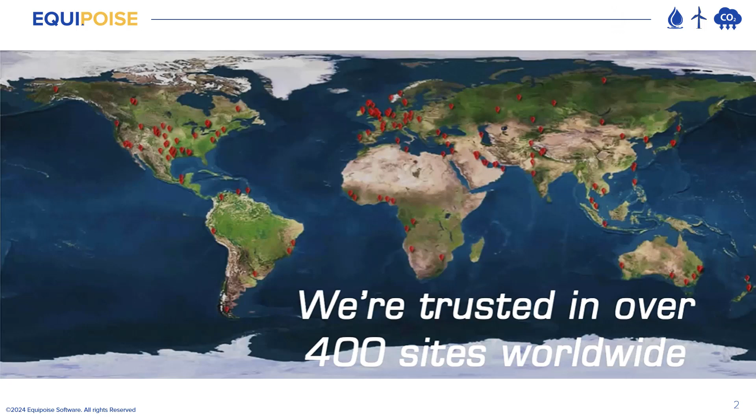In the pursuit of unravelling the mysteries hidden beneath the Earth's surface, accuracy is paramount. Every decision made in exploration and production, the sites for carbon capture and storage, and the placement of offshore wind turbines hinge on a clear understanding of the subsurface geology. I'd like to thank you for spending the next hour with us, where I'll discuss the importance of incorporating a new methodology to your geoscience workflows.

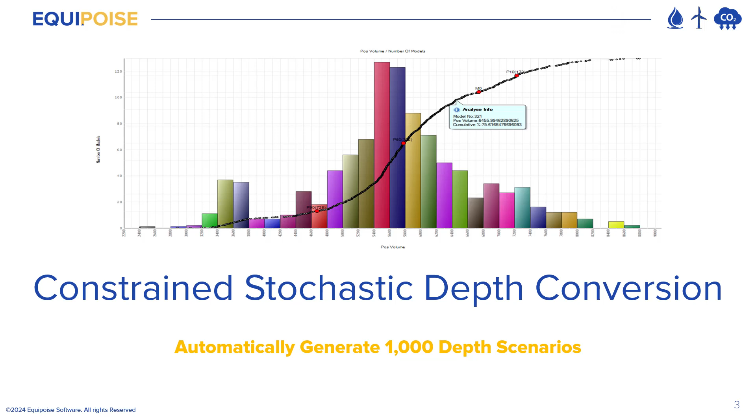Our cutting-edge toolset enables you to perform Constrained Stochastic Depth Conversion, which will revolutionise the way you approach subsurface analysis by enabling you to automatically generate 1,000 depth scenarios varied around your best technical case model. This methodology transcends traditional deterministic approaches by integrating geological knowledge and statistical analysis, whereby you control the range of variability per layer.

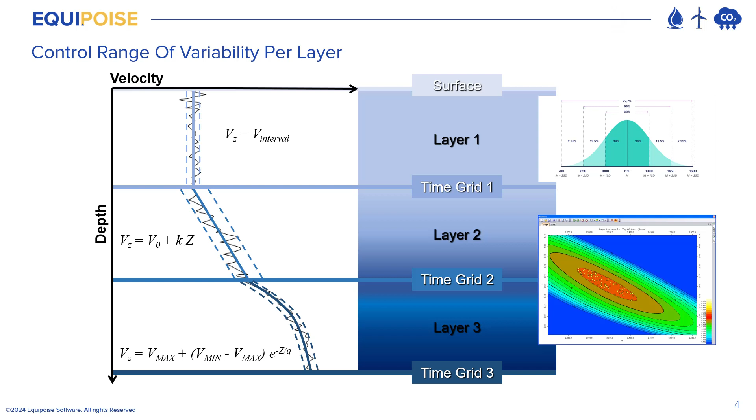Velit transforms uncertainty into opportunity, offering a nuanced perspective of the subsurface landscape. Whether it's optimizing well placement, delineating reservoir boundaries, assessing exploration prospects, or safely positioning geohazards, Velit empowers you to make informed decisions backed by robust geological intelligence.

By making a cost-effective investment, you can potentially save millions of dollars versus the cost of a misplaced well, and calculate a highly likely prediction of the gross rock volume of your reservoir. This workflow will thus determine the likely economics of your target prospects and ensure the safety of the teams working on the drilling rigs.

As I'm sure you're aware, modern-day pre-stack depth migration volumes, even with the latest full waveform inversion processing techniques, are created to optimize for the best seismic picture and are not optimized for true vertical depth. They also offer only a single model of the subsurface. The question I have to ask you is, can you afford to risk everything, including your reputation, on one model of the subsurface?

Velit easily enables you to de-risk your workflow by automatically creating 1,000 constrained models varied around your best technical case model, utilizing a scientifically robust methodology. This provides you with a statistically significant number of gross rock volumetric ranges and an understanding of where your PSDM, or best technical case model, is situated against your P10, P50 and P90 values.

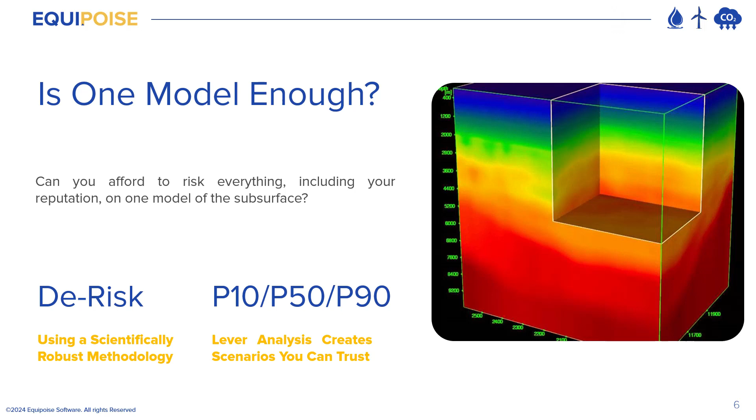You can also compute lever analysis to determine the geological layer most sensitive to the GRV calculations, allowing further constraint to your depth scenarios that you can trust. These models can also be summed together to give you a highly likely understanding of the structural closure of your reservoir. With Velit, you can now supercharge your subsurface decisions and be on target in depth with unparalleled clarity and confidence.

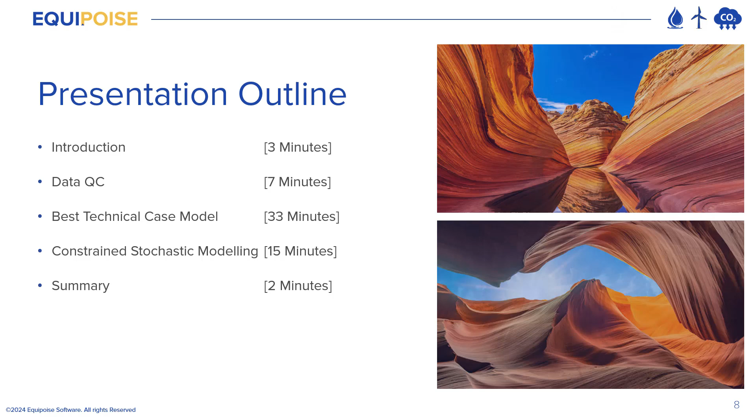After that brief introduction, the presentation outline is as follows. I'll spend a little bit of time discussing data QC, and then the importance of the best technical case model, before focusing the remainder of the presentation on constrained stochastic modelling. And without further ado, let's have a look at data QC. And as I'm sure you're aware, 80% of the project work is in the data preparation.

And here we are in Velit. Now, I've deliberately excluded the part of the presentation which surrounds the data loading. The main focus of this presentation is to discuss the highlights of the software, and while data loading is very important, I've decided to exclude it at this time.

Suffice to say that the key elements of data that Velit will bring in from Petrel are the time grids, the wells, the formation tops, and the seismic velocities. And we are going to construct a layer cake depth conversion model to describe the velocity changes of the layers accordingly.

Now, as part of the data QC, one of the key aspects is to have a look at the data that's come in. And one of the first things that we can do is have a look at the data in 3D. Now, this is to assess whether the auto pickers that are used in Petrel for interpretation have been used appropriately.

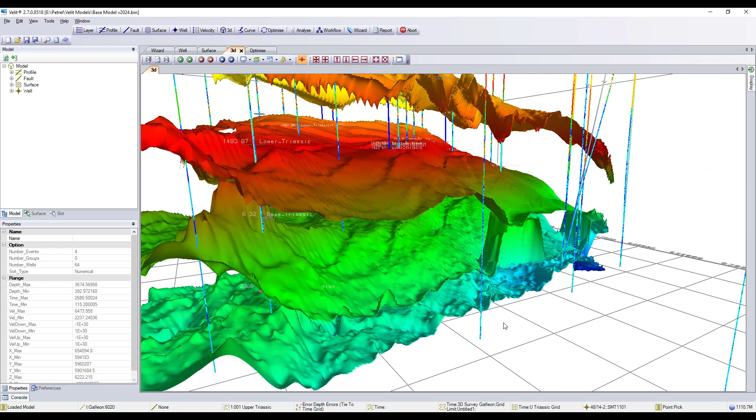And as you can see here, there's some picking issues where right at the end of a transect, if the picking was done in this direction, perhaps there's been an error introduced which is not geologic. In this scenario, what you would do is go back into Petrel, correct the error, and then reload the time grid and replace this third layer with the correctly picked grid.

It's important to note here that going through the data loader for this process would take about 30 seconds or so to complete this operation.

The next thing you might want to do is QC the wells. So in here we have the model tree, and we can select a number of different wells which we can work through and have a look to see if they are conditioned appropriately. Now this well has been divided into the 4 layers of the project, where the formation top, which you can see on the left hand side, meets the time grid on the right hand side.

One important aspect of using Velit, which goes back to the basics really, is that you really want your models to conform with the velocity changes that you see in your wells. Now this data set is a demo data set that's been supplied to us, and as a simple 4-layer model, it excludes some of the key changes in velocity which you'd want to capture in your models.

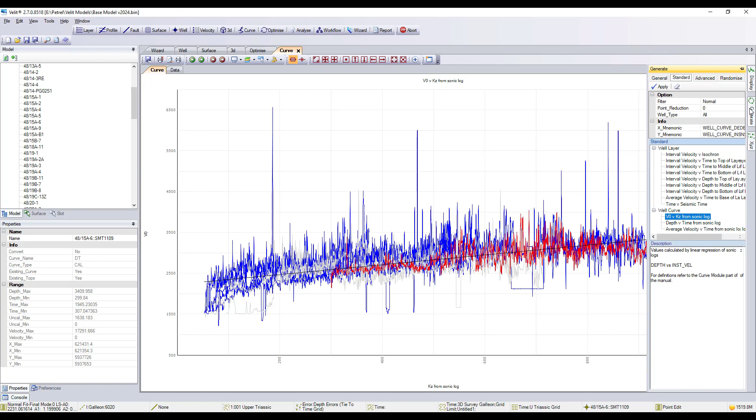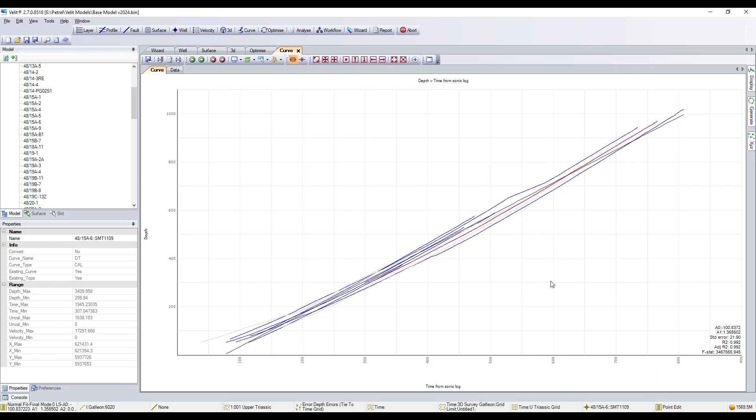Here you can also QC through the data in different domains. So here we can look at the logs in the depth versus time domain, for example, or you can have a look here in the average velocity versus the time from the sonic log. Again, where you might see a well operating in a strange position on these plots could help you identify some of the issues with the data and enable you to correct it.

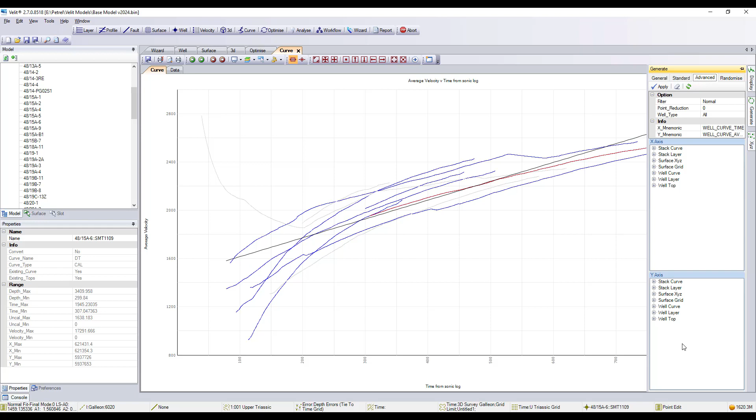When you're using Velit, you can use the Advanced tab here, and you can also cross-plot any x-axes versus any y-axes. And with all the data loaded, it means that all of the plots are available straight at the click of a few buttons for you to help you quickly work through and QC the data that you need to work on back in Petrel.

Performing the QC is quite iterative, but at a certain point you'll be happy with the way that the data is conditioned and you'll want to start building your best technical case model. The benefit of Velit here is that you can iteratively test many different functions per layer. So now I'll spend a bit of time going back into the software and having a look at all of the cool things that it can do.

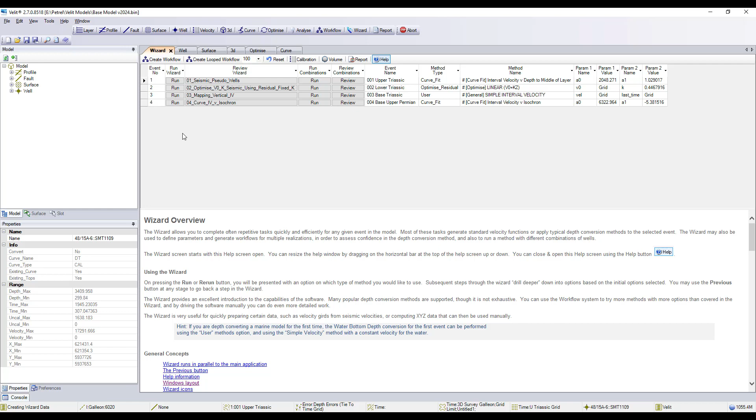Velit has been developed for over 20 years now, and we've more recently included the wizard, which provides you an easy-to-use interface for you to drive the software and perform the depth conversion functions per layer. Now, during this section, I'll start off fairly easy and work through some of the more complicated functions in turn.

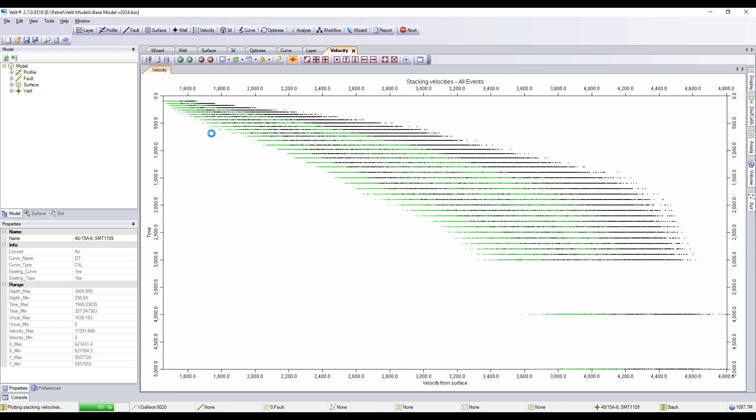If we start here with a simple graphing method, the software checks that the data is loaded okay, and what you have are a number of different graphing methods that are then explained in the section on the right-hand side. So providing you have an understanding of the language of geophysics, any selection that you make, you should be able to read the corresponding information to make an informed decision on your pick for that layer.

Now, Velit allows you to choose a number of different methods and to compare them such that you can iteratively find a best fit for the data that you have in your project. For this model, we'll just start off with looking at apparent interval velocity versus depth to middle of layer, and you've got the option to show the labels on the graph.

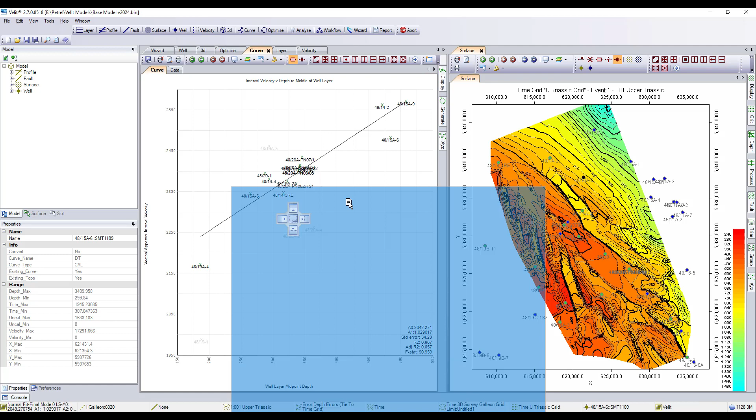Now, for this point, this video is obviously on one screen. If you're working in a two-screen environment, the software is designed so that you can dock the windows and stretch them over multiple displays so that you can have your analysis performed with more screen space. But on here, I'll just minimize these down just to get a bit of a better view for you.

Now, when you're looking at this, you're looking at the active well in the window here. So for example, you could open up the well tree, you could select a well, and you could see the well update here. You can see the black dot on the map update here. But when you're looking at the data in the curve display, you're going to be performing your analysis to understand the story that the data is trying to tell you.

Now here you can see some of these wells have been grayed out, and that's where I've turned them off using the point edit tool. You can also turn off data in the data tab using the tick boxes accordingly. When you select the data using the point pick, you can click on the data point and it will update the well and the black dot as the active well on the surface map and give you an understanding of where that is situated spatially and what is going on for the given layer. Now, the functions that we're looking at is just for layer 1 for this analysis.

Now here you can see that there is a replacement velocity that's been arbitrarily used for the well, and at this point, if you're under time pressure, you can just turn off this data point, perhaps if it's knocking off your overall regression parameter, which is shown on the graph here. If you include this data point, for example, you'll see that it makes quite a significant difference to the regression parameters. Now, in an ideal environment, you'd actually want to go back into Petrel and create a synthetic to surface to encompass this, and therefore remove this artificial value that's been created from this replacement velocity.

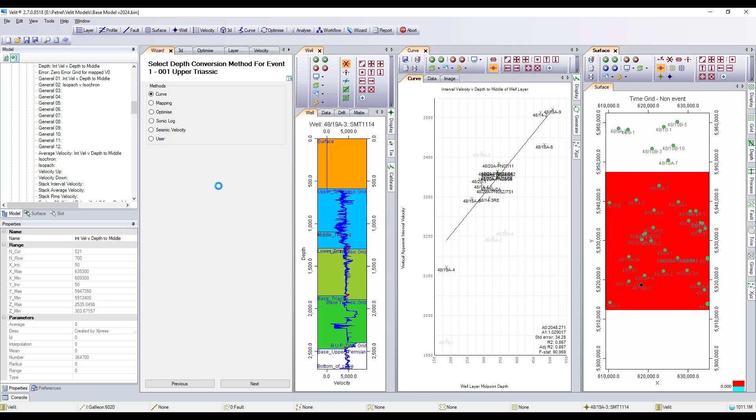Now, just to show you how quick it is to then compute another option, here you can select another function just by working through the relevant options in the wizard. We'll select isopach versus isochron. Again, there would be some time spent on the analysis that you would look at the data in, but assuming that everything is okay and the data is conditioned in good order, you can actually use the software very quickly just by working through the wizard, clicking next, and allowing it to do its job in doing the depth conversion using that function.

Now again, I will just click on next, ignoring error correction at this stage, and work through the wizard like so. So at this point, within about 30 seconds to a minute, you have your second function recorded, and in the relevant slot, the depth is then updated, and again, you can copy and paste into these slots. So you're then able to click on these values for the grid and for the discrepancy in the formation top, and with that compute things fairly quickly to get an understanding of how a best fit might be working.

Now, just between these two sets, you can see the values of the residuals are perhaps a bit higher, and therefore we'd be in a situation where the first option may be more appropriate to use than the second.

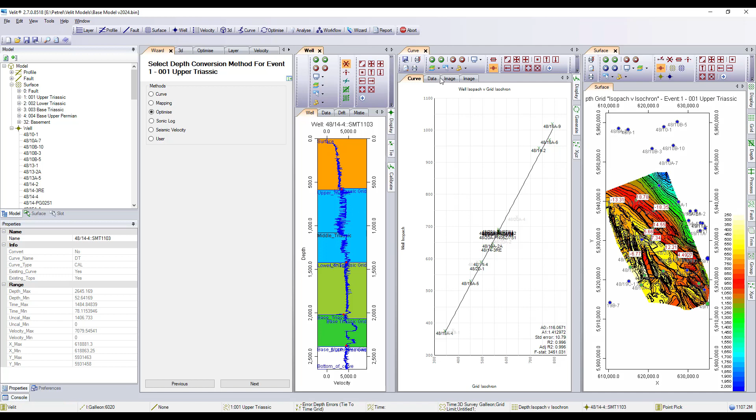Now, as I go through this presentation, we'll have a look at a couple of different options. But one of the key aspects of this in building the best technical case model is the use of our optimize module. Now, our optimize module was developed with Dr. Al-Chalabi, who wrote the book Principles of Seismic Velocities and Time to Depth Conversion, and it contains an algorithm that will obtain the optimum V0 and K value for a given layer that has an increasing velocity trend or decreasing velocity trend with depth. So, for example, if we're looking at a layer like this, this would be where the optimize would be useful to use.

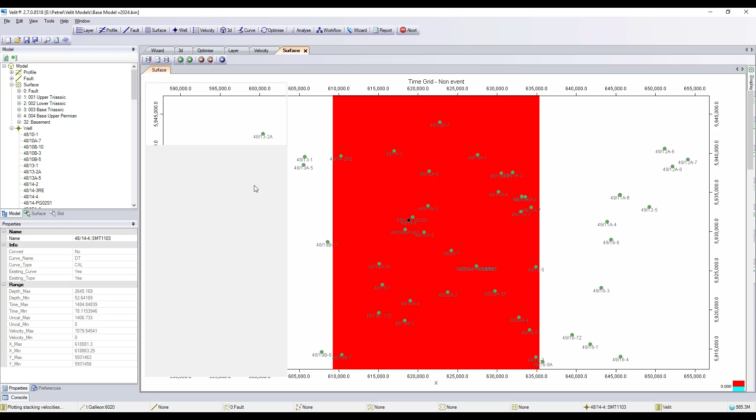Now, I'll just close these windows and run the optimize accordingly. So on here, what I'm going to do now, when the software is ready, is I'll just describe to you how the function can be worked to create a geological propagation of velocity per layer. Now, typically you'd work from the seismic datum, but there may be cases, if you're in deep water, for example, where you don't want the velocities to conform with the surface. You actually want them to conform with the seabed.

So Velit enables you to load that data and then select the seabed as the surface, and you would then assign the first layer to have the velocity of water contained within it. Alternatively, you've got the ability to encompass uplift and have the velocities again propagate in accordance with what they look like on the seismic. So if you see your seismic reflections being parallel to the surface or parallel to the base, you can set the P factor to be 0 or 1 respectively.

More often than not, you'll actually find that there's some level of decompaction, and that there is the percentage value here that you can adjust to encompass the velocities being propagated within the layer using that factor. In this project, I don't have deep water or any uplift, so I'm just going to work ahead using the seismic datum.

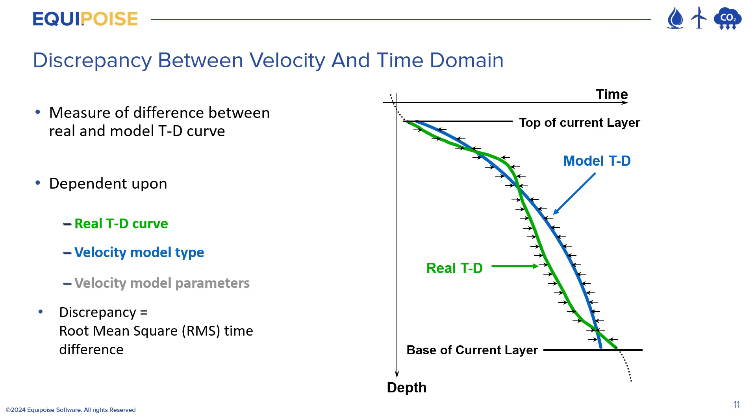To understand this discrepancy, at each sample down the data, we can calculate the root mean square time difference to get an overall understanding of just how good a fit our model is.

One of the key teachings in Dr. Al-Chalabi's book highlights that the minimum discrepancy does not imply minimum depth error. If we look at these two models on these graphs, the first on the left-hand side shows the actual data in green, with the model time depth curve being very closely aligned to it, as the model is force-fitted to the data.

Hence there being a non-zero depth error. On the right-hand side, you can see that the vertical apparent interval velocity has been computed such that there is a zero depth error at the well location. What you'll note is that as the model moves away from the well, you're then not predicting velocities very accurately at all.

Hence you have a poor velocity model. Velit is quite special, therefore, in this case, that it enables you to compute velocity models for a given layer in the time depth domain. And the algorithm used does this force-fitting process such that you can have a very robust velocity model even from one well.

The benefit of using this technique is that the velocity model is independent of the seismic interpretation. It can estimate a reasonably good result even from only one well. It honours the well velocity data as much as possible. The residual depth errors offer the opportunity to evaluate the difference between the model and reality, and the depth error can be corrected later in different ways.

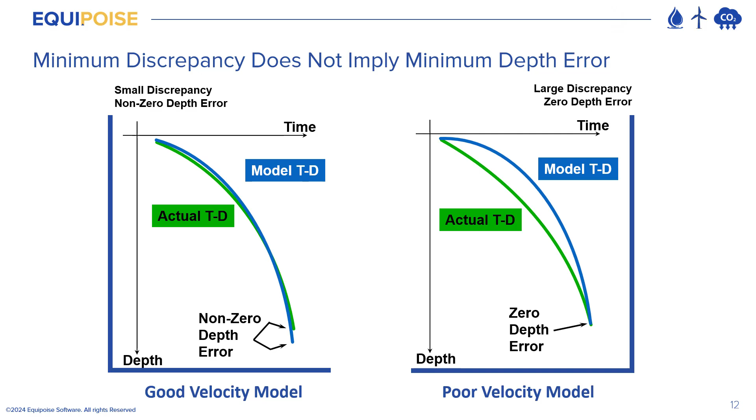Now that you've got both of these graphs in your mind, I'll go back to the software. The fit to well curves method relates to the graph on the left-hand side, where we're going to use the algorithm to force the model to bend to the data in the time domain. The second option, to minimize the residual tie with the well formation tops, is the graph on the right-hand side. But this is only really useful if you have a high density of well data.

In looking at the software, what we can see is that before the optimize is run, the algorithm has determined all of the possible V0K pairs for a given well and determined the best V0K pairing for that well, as represented by this dot.

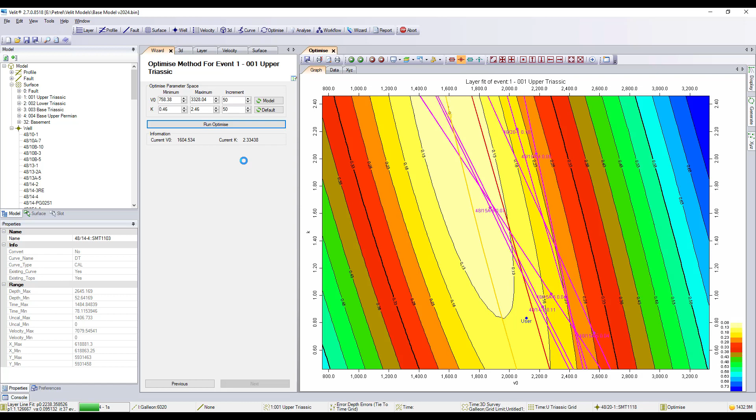Now, all of these are then computed in turn, and when we run the optimize, which just takes a few seconds to run, these values are then contained within this solution trough, where the best fit for all of the wells is determined by this value here. So the K is determined, as is the V0. And this would be the value used to compute the velocity field per layer.

In moving through to the next screen, we also have the option within Optimize to fix K and contour V0. This could be especially useful if you have a facies change across your survey area.

So for example, if we compute this option, we'll see the values of V0 at each of the well locations in turn. Now you can see in this data set, even from the range of data, that there isn't a facies change here. We're not seeing a strong change in velocities. These are all representing fairly soft rocks. If we were going to carbonates, etc., these might be toward, say, 5,000 meters per second. And this application of this process would then balance out that variation.

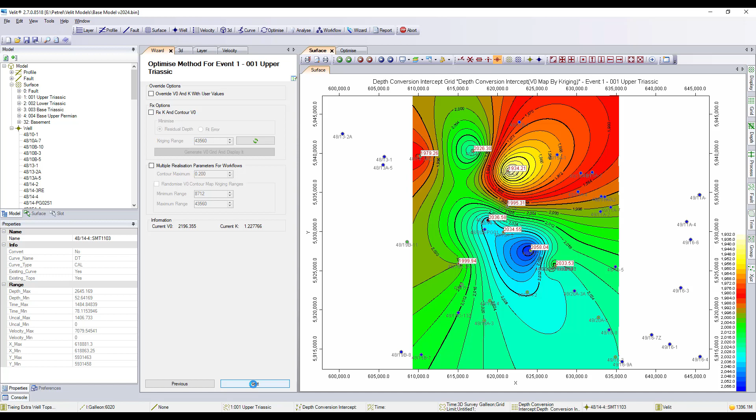So you can have both a vertical velocity gradient and a lateral gradient encompassed using this technique. Now, as we don't have this option available in this data set, it's not applicable. I'm going to press next and work through to compute the final depth map.

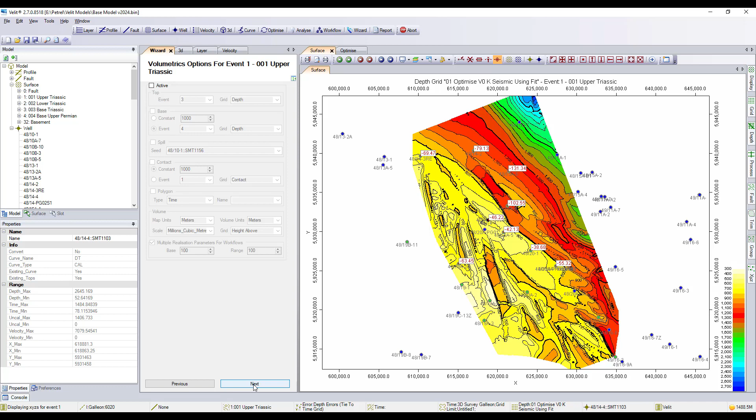Now on here, you'll notice almost immediately that the values at the well locations of the residuals are reasonably high. And if you imagine your discrepancy as a percentage of depth, you might be able to understand that there's an issue here, that we go from depths of around 500 meters down to about 1,200 meters.

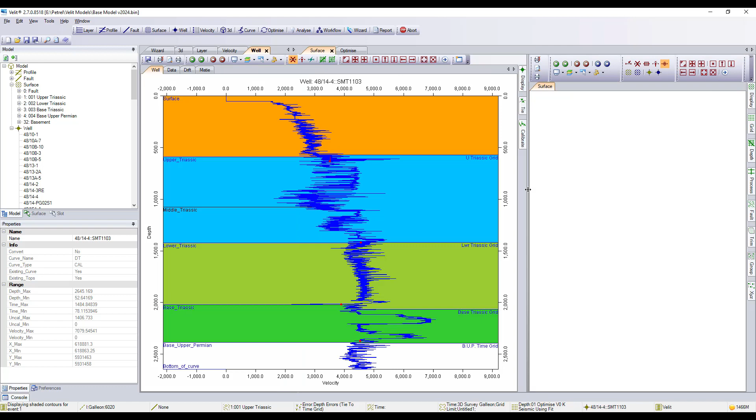So these are too big. If we have a look at this against the well for this project, what we can see if we expand the well display is that at this point here, the velocity model really should be broken up into a separate layer. And what Optimize is doing is trying to fit a regression through this data and therefore computing an answer which is too fast, as this layer has not been broken out.

So this is really just been used to highlight the importance of getting your layering right, as the Optimize will do the best job it can with the data it's being given. But you will see here that trying to average too much will not give you the accuracy that you are perhaps looking for.

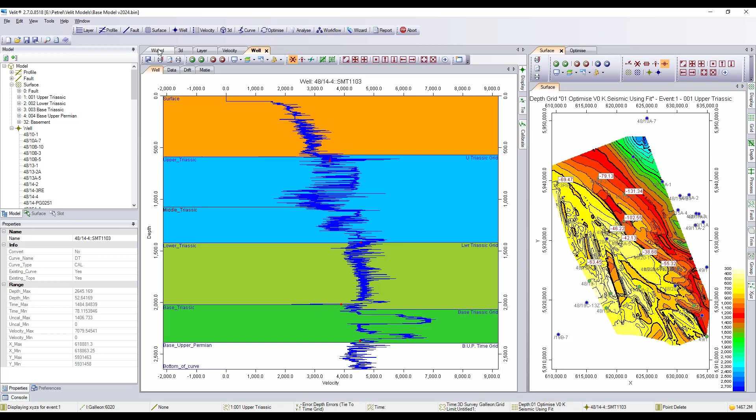The next thing I'd like to discuss with you is the use of seismic velocities with your project. And in here, we have this seismic velocity calibration wizard that we can use to calibrate the seismic velocities on a per layer basis.

Now I'll just run this calibration on the first layer for you to get an understanding of what it does. The software permits you to use a single value to compute a scaling factor, which would compute the Dix scaling and adjust all of the velocities by that single value that you would choose based on your analysis between the wells. You can also compute a single constant from a graph through a regression through the data points.

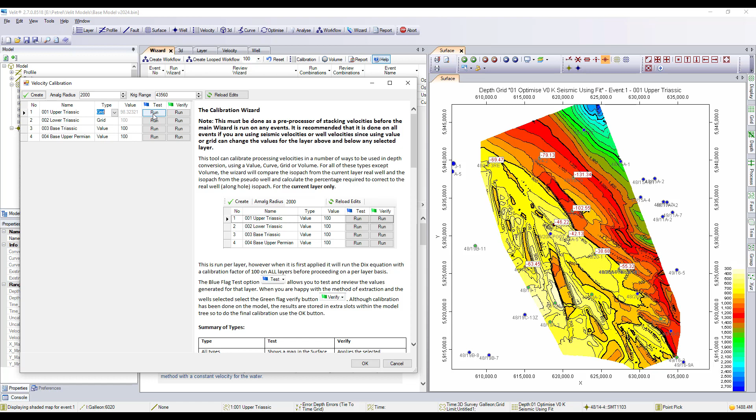But the most useful option is our grid method. Here what you're able to do is have the software determine the scaling factor that would be appropriate to tie the well velocities to the seismic velocities at each location.

As this grid has been generated, you can see in this data set there are some issues in some of these wells, some bullseyes that stand out. If you were to QC these, you'll see that there's a discrepancy in the data, and this is again something that you would want to fix and have the data conditioned appropriately.

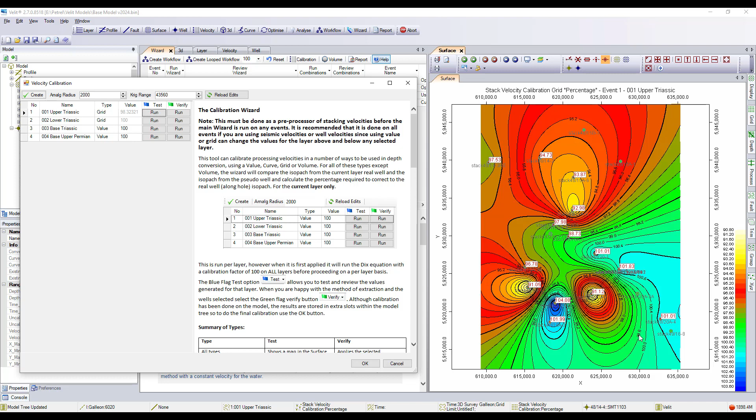Once you have this grid computed, you can then run the correction of the velocities for that layer. So at this point, we can click on Run, and these are then the values after the calibration has been performed.

So here at this point, you can see that the velocities are 100.32%. And what this relates to is that there is a slight rounding issue. So you can see that maybe the perfect match was 99.5, for example. And most of these values have got to almost 100% through this calibration.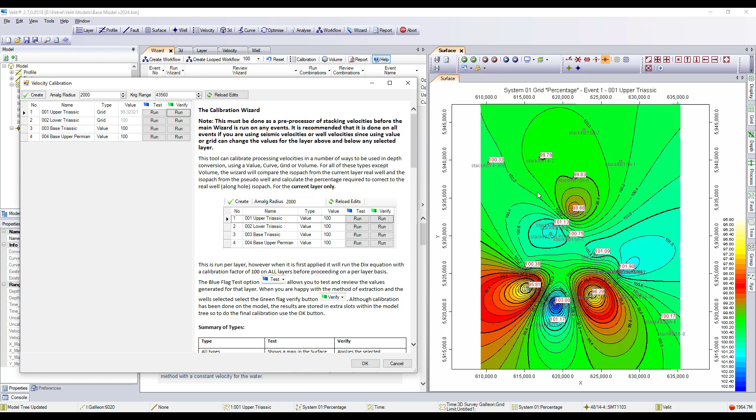Now this is very important because this lateral scaling factor that you have can then give you a strong confidence in the move or the shift from the processing velocities, which we know aren't optimized for true vertical depth, and in calibrating them to the wells in this grid format, then you will have the ability to leverage them for your work going forward. So you would perform the calibration per layer, running it through each time.

Once you've done that, you can then use the seismic velocities in the software for a number of different options. Within here, you could just use the velocities from your volume uncalibrated. You could do a direct depth conversion of those velocities, as you can see here. But typically, as you might be aware, this isn't going to give you the accuracy that calibrating the volume will give you. Now, there are a couple of techniques that we can discuss.

The first is if you have fairly flat geology. So here you can generate an interval velocity grid with no depth conversion. And in this process, you've got the ability to then smooth the velocity data that you have within the model. As you can see here, the velocities are contained within the project, decimated and illustrated by these pink dots that you can see across the survey area.

Now, once this has computed the grid of these raw velocities, you've got the option for smoothing. So on here, we can apply a simple moving average smoother, or we can use a more advanced multipath smoothing. For the purposes of this demonstration, I'll just use this option as it's a little bit quicker.

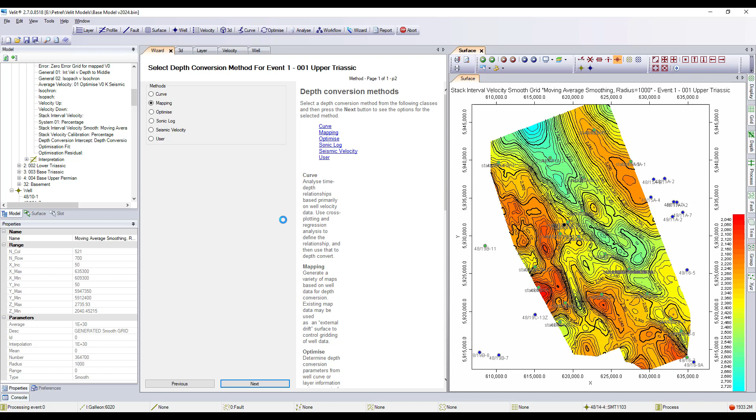We can then do a mapping method, and again, just to reiterate, this would be useful for fairly flat geology. And we can map the well vertical apparent interval velocities.

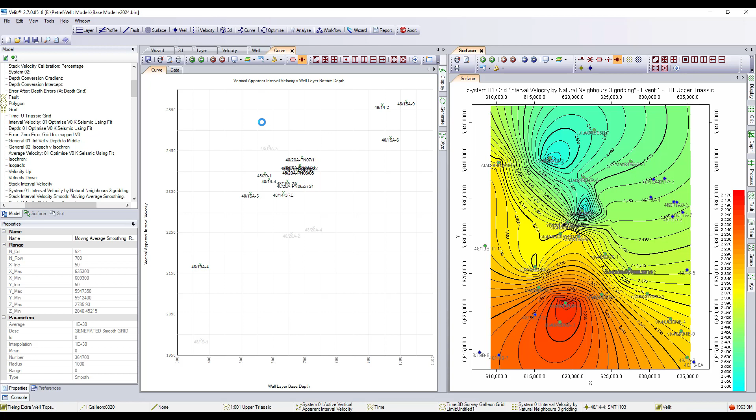Here we'll use kriging, and the first thing that we want to do is make an assessment between the grid that we've just created and the values in the wells. So at this point, we've got the option here to check the regression. So in selecting this, we can see the regression through the data, and we have a reasonable R-squared value such that we can say, okay, the velocities correlate reasonably well, we'll be okay to use them.

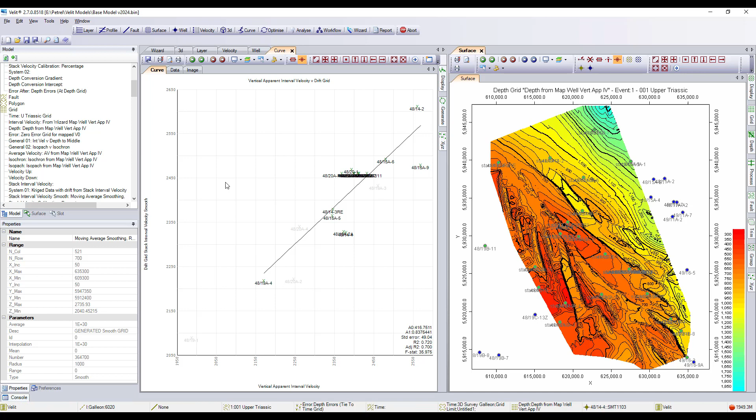From this point, you can then generate the grid. What the software is doing is computing the vertical apparent interval velocity at each well location. Then as you go away from the well locations, it's defaulting to the drift grid that you've just created from your calibrated processing velocities.

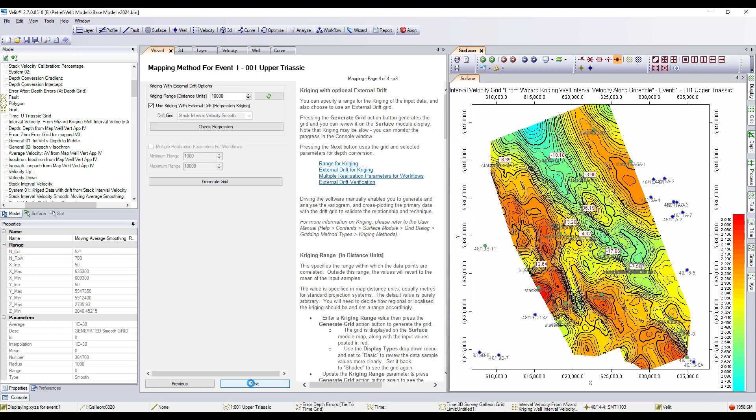Using this for the depth function, you can have a very nice computation of depth where you have lateral velocity gradients but no vertical component.

When you get to more complex geology, you might want to encompass pseudo wells, and the software enables you to compute pseudo wells at the click of a few buttons. Pseudo wells are just a selection option within the wizard, and this is where you can define the amalgamation radius and their spacing.

This radius relates to a 2 kilometer radius around a specific location where all the velocities will be averaged per sample, and as it does that through the entire sequence of data, it will build a pseudo well accordingly. So through here, in selecting the grid, then clicking pseudo wells, we can generate this regular grid across our survey area and augment the number of data points we have away from our known well control.

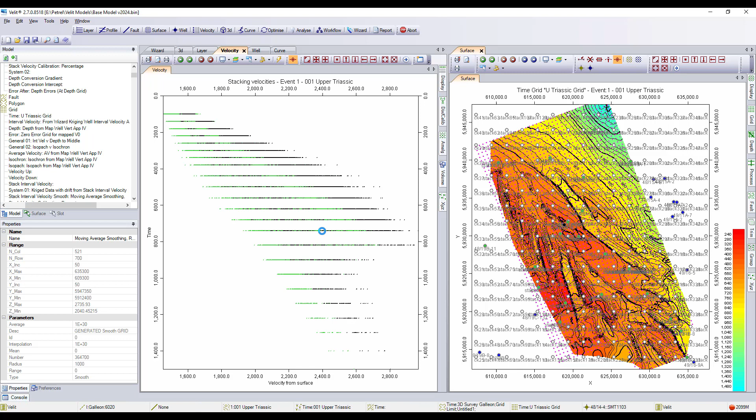Now the key thing here is that because we've done the calibration process, we'll have strong confidence in the use of these values. So if we, for example, have a look at the well in the project and click on a well like so, you can see how the pseudo well has been created through this amalgamation process.

While I've done this toward the end of this presentation, you'd actually perhaps perform this right at the beginning, after your data has been QC'd, such that you can use these pseudo wells for all the other functions and options contained within the software.

You can also see that these pseudo wells are showing some of the key velocity breaks, and that the model we've got as a 4-layer model in this project is perhaps too simple, and this should be a 9-layer model, as you can see in the well logs.

Now on here you can see that some of these trends are replicated in other wells, so it's not just a fluke in this location.

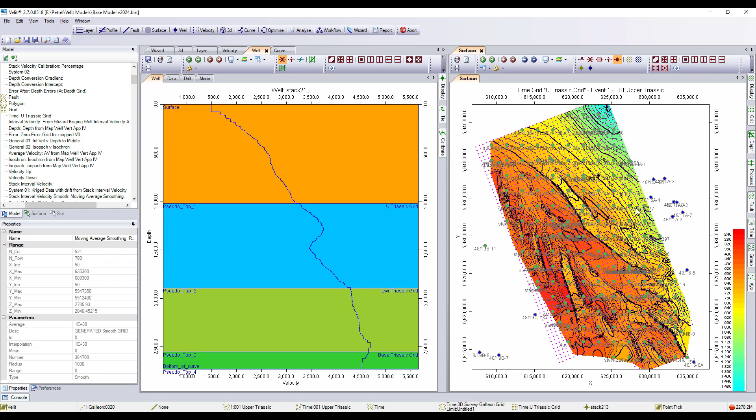So as you work through the software, you'll get an understanding that you can start to build your best technical case model through choosing a number of different functions per layer and working through the software like so to get this computed.

Now when you think about the operations you've done, all of the clicks you've taken through the wizard have actually been logged in the console. What you're able to do is then create a workflow of everything you've done, which moves us from the wizard interface into the workflow interface.

In here, you can make your assessments, and I can bring up an example I've prepared earlier. Now, you wouldn't have both of these on the canvas at once. You would have the best technical case represented by these 4 boxes on the left-hand side.

One of the key aspects of Velit is that it is fully transparent. There's no black boxes. Every click you've made through the wizard has been logged, and the workflow system enables you to get the answers of how the software computed its results.

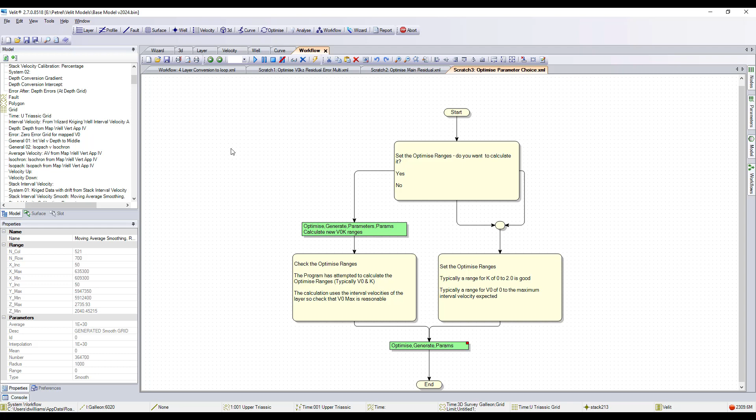So in here, you can drill down deeper and deeper, which can give you invaluable weight of technical evidence as part of a peer review process, for example.

The workflow system also provides you the ability to run audit trails. If you come back to a project several months later, you can see how this has all been worked through. You can distribute these workflows to your team, and if you have a new well come into a project, you can rerun the whole depth conversion incorporating that data just at a click of a button.

Now, when you're thinking about the selection of these functions, you might start to question, okay, well, which function may be more stable than another? And this is where the combinations option comes in.

Now, in order to compute your best technical case model, you'll iteratively choose several different functions to describe the velocity changes of a given layer. And what combinations does is run an automated blind well test where we turn on and off more and more wells through the process.

And here I can just delete the pseudo wells, and we run it through this Gaussian distribution where we progressively drop more wells through more models.

Now the process actually takes some time to run, as it will do the depth conversion of all of these options, and it can be a bit time consuming if you select everything that you've run. So really this option is to be used so you can determine the most stable method from several that you've determined to be better than the rest.

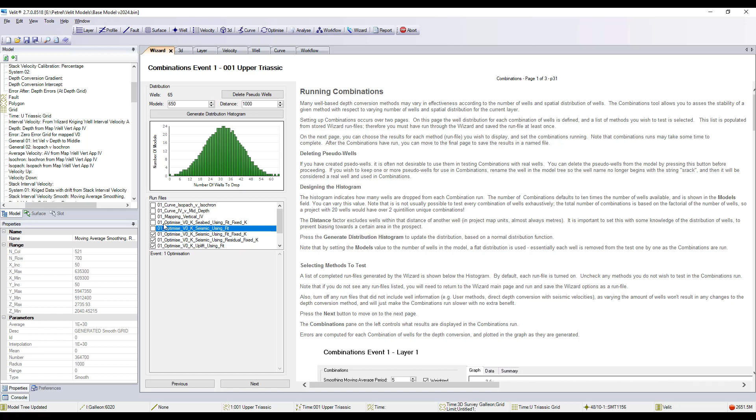What you'll then see is a plot where the functions that you're working with are shown with the color, and the software is showing the value with the well on versus the well off. And here you can make an assessment of how stable a function is using this option.

Through here you can see that the functions represented by the blue and red curves are quite unstable in their prediction of velocity as you drop more and more wells through more models, whereas the green and yellow are more stable. And then through the use of the software, you can ultimately determine that the yellow function is the most stable of the options compared.

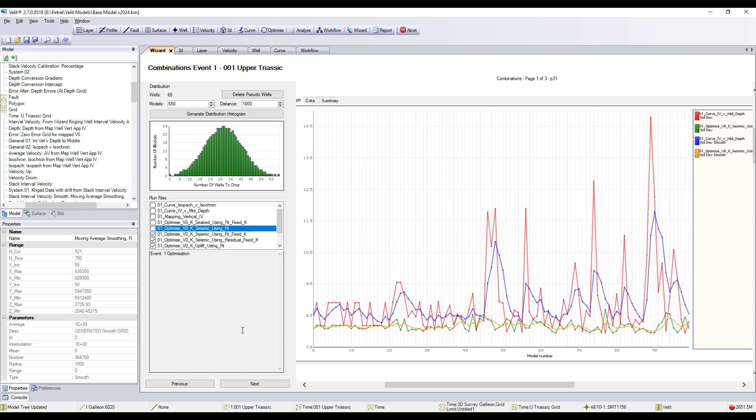So it's at this point where you would then think, okay, well, I've got to my best technical case model, and I'd like to start thinking about uncertainty associated with that. For the remainder of the presentation, we'll see how constrained stochastic modelling can help revolutionize your subsurface analysis.

Now, there are many functions that are contained within the software where the time available to discuss everything that the software does is perhaps too short. For example, there are a number of different methods, such as the salt wedge method, which could be useful, or options like Faust, which describe a nonlinear change of velocity with depth, etc.

At this point, I'd just like to take it as read that we have chosen an optimal function per layer, and that we are now happy to proceed to compute the multiple realizations based around our technical case model. So in here, I'll go back to layer 1, and the software remembers where you were last. So in adding the range of variation, it's quite handy because you're able to quickly work through the wizard and tick the relevant boxes to add that.

What you can see here is if we tick the multiple realization parameters for the workflow, this box opens where we have control over the range of variation for these techniques. Just to give you an example, what we're doing is providing a range that can fit around the data. So here the confidence interval of 95%, you can adjust that to encompass more or less of the data.

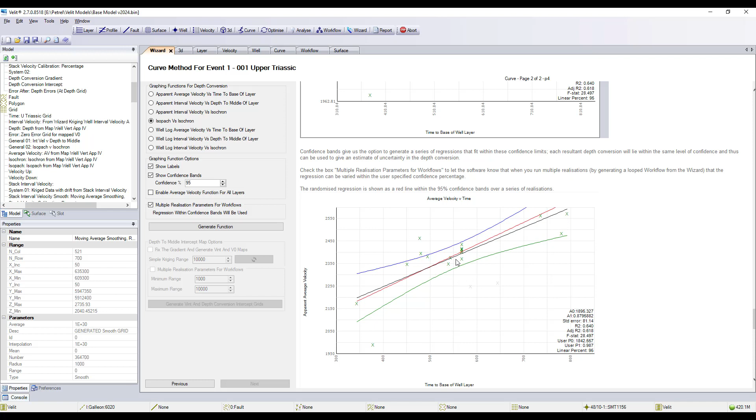And we can then take any regression that falls within these confidence bands, which will give us a unique parameter set, and say, okay, for the first layer, I'd like 1,000 parameters that could be used for this range of variation. Now, as part of this constraint, one of the important elements of Velit is that the way that the randomization is done is that these values are not just pulled arbitrarily. Predominantly, most values will be close to the midpoint, with fewer values being selected further away.

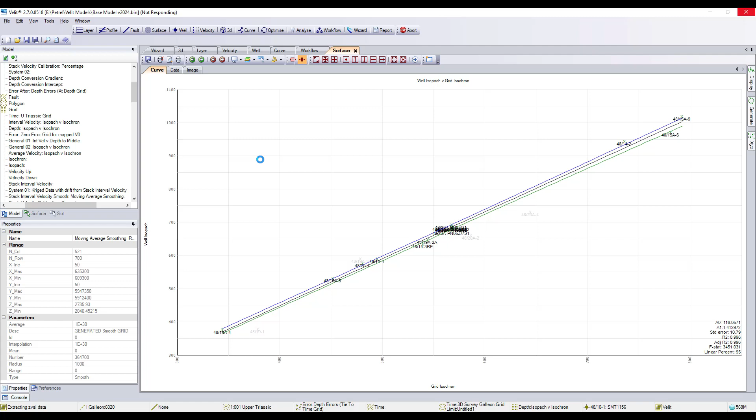Now, when we generate the function and add that to the first layer, we then come through and we are provided with the same choices that we've had through the wizard when computing the best technical case that I've just skipped through fairly quickly. Now, what you'll see here is, again, we're presented with the options for error correction. But if you imagine that we've added the range of variation for the other layers, and this can be used from the Al-Chalabi solution through Optimize, just as one example, you get to the final layer, and you might want to add error correction to tidy up your final residual values.

So here, let's assume that this is the last event. This would be the optimum that you would choose. Here, in adding the range of values, you're giving a minimum range and a maximum range, which ideally you should base equally around the simple kriging range. You could adjust it to include some bias. So, for example, if you specified 10,000 at the high end, it could give some spatial bias toward the maximum range.

At this point, when you add that, then the next option is perhaps the most important, as this is then allowing us to specify the volumetrics for the computation. So in here, on the target horizon, again, imagining this is the last layer, you can select this as active, and you can work this volumetric computation in three different ways. The first is between a top and a base, so you could compute this between two layers.

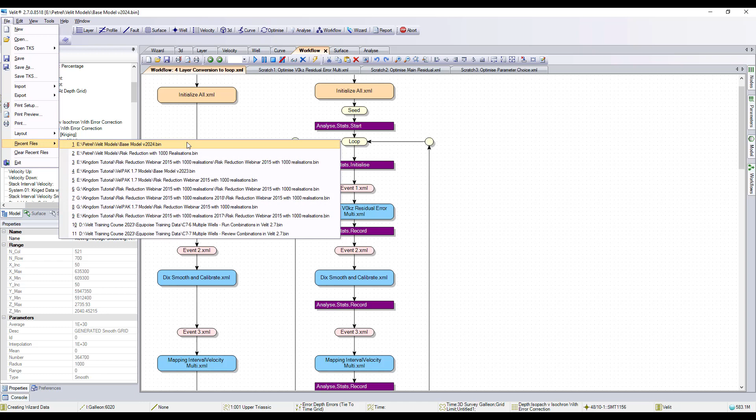So this perhaps is far too optimistic, and what you'd be looking to achieve is an M0 close to the P50 value. This would then give you strong confidence that your model is likely, and also give you extra credibility or weight to your argument that you've taken all of the technical steps to have a very comprehensive model as part of a peer review process.

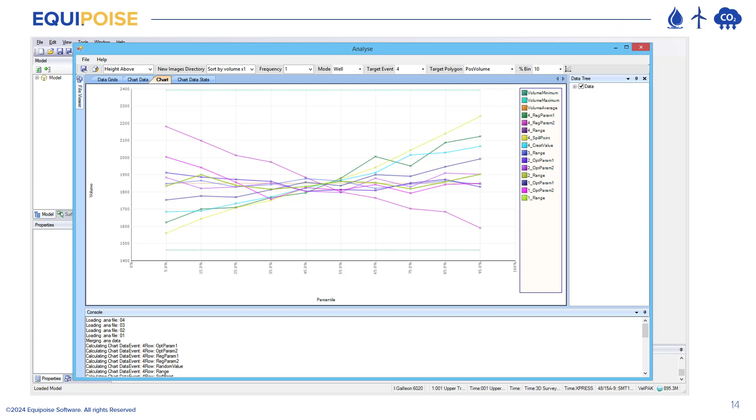I'll just quickly pop to a PowerPoint slide here to show the Velit analysis tool and how a spider plot can be computed, which encompasses all of the variables that go into the multiple realization run by layer as their prefix, and how these can be plotted against their volume contribution and their percentile contribution. But more importantly, if we look at the chart data stats, then we can see that it's the F statistic column which shows the sensitivity of the relevant component in the computation. And this describes that as you go away from 0, you're more sensitive to change.

So in this project, what we're seeing in the 4th layer is that the higher range of variation is hugely sensitive to the overall gross rock volume, whereas within the 4th layer again, the lower range of variation is reasonably sensitive in comparison to the other layers going in there. So what you would be able to do is go back into the wizard, constrain the sensitive layer or layers, and then rerun that through the multiple realizations, so another 4 hours or overnight, and then you'd come back with a range of simulations that you would have strong confidence in.

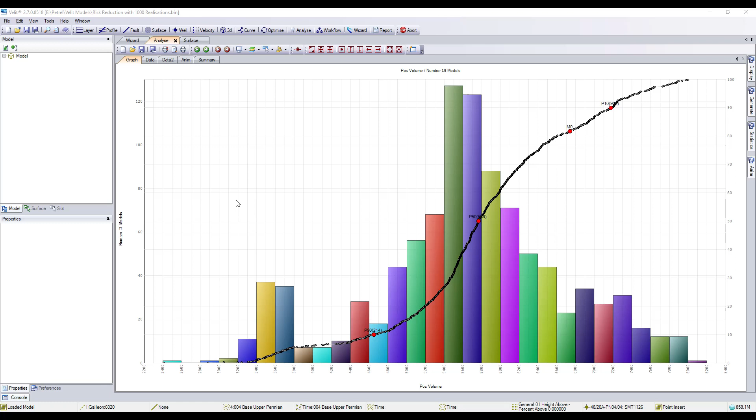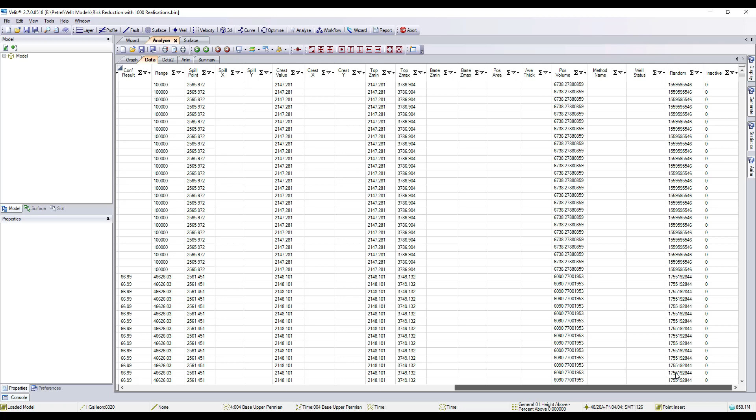Back in the software then, this weight of data that we've created is what we advocate is essential for determining accuracy within the subsurface and goes far beyond that of one single model. Here, within the data table, you can see all of the parameters that have gone into making every model, and you can sort and filter this table to exclude any realizations that you think are invalid.

Here you've got the ability to run an animation where you can see each frame of the animation relates to one of the structural scenarios. And it's quite interesting to watch this to see areas of connectivity within the reservoir, etc. Now at this point, it's important to note that each of the simulations are equally likely. And so while this is interesting, it's not necessarily as scientifically robust as other methods.

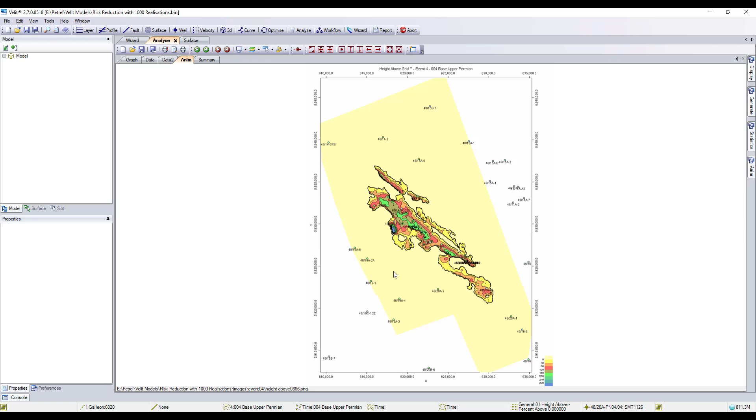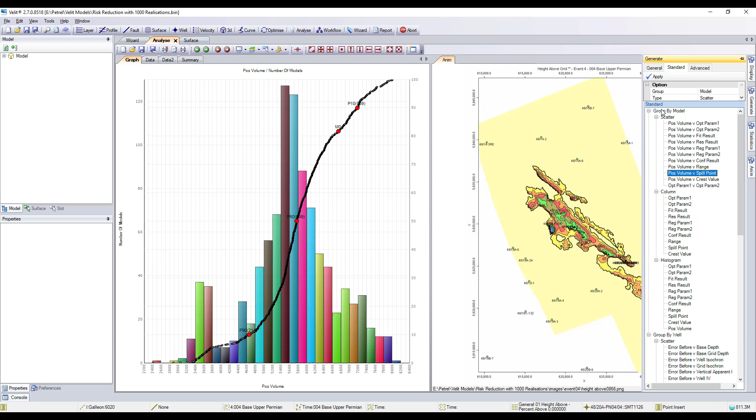What the software enables you to do is to evaluate a number of different options. So for example, you could do a scatter plot of the spill point and see how these accumulations are situated graphically. Here, for example, you might assess these maps on the lower end to see how this reservoir structure looks. The majority of simulations seem to look like this, where you have this accumulation here. And in this project, you can see that this higher range also has this accumulation here.

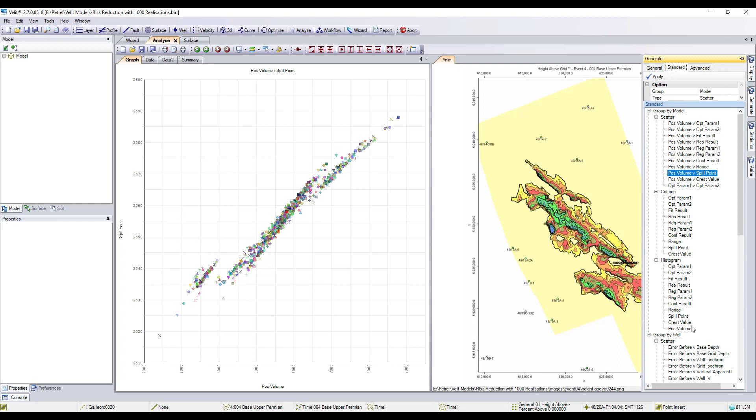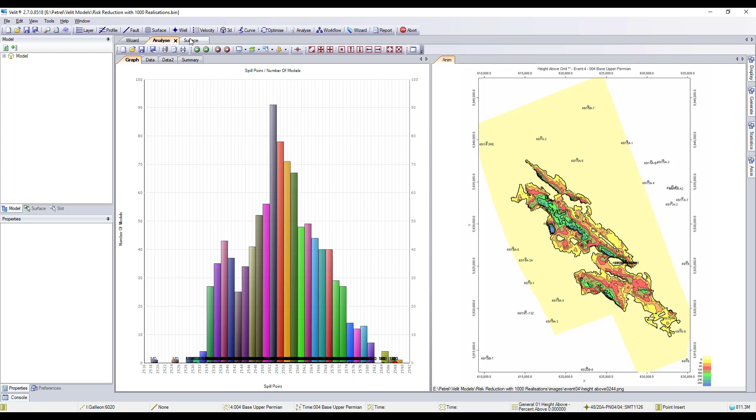So it would be your job then to have a look for any other data, such as evidence from petrophysics, that indicate whether there is connectivity between these structures, such that you can exclude any data that is contained within the multiple realization run. You can also do a number of other stats, and we can only cover something simple in the remaining time. But here, for example, you can get quite granular, down to a small number of meters, understanding where the likely location of spill may be for your reservoir structure.

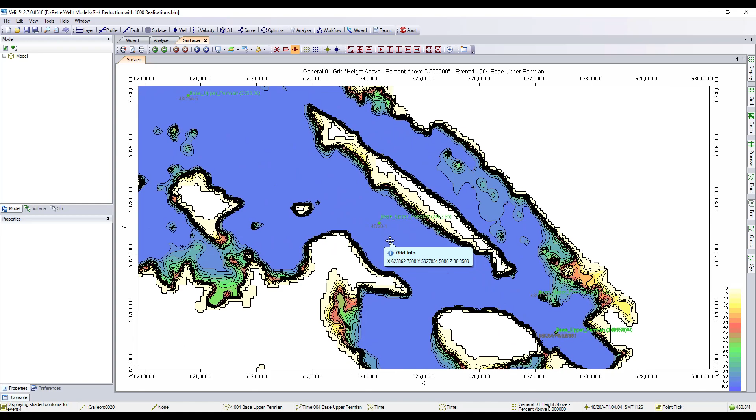Within here, the weight of data enables us to stack all of these models together and generate a probability of closure map, where you can see the color is the percentage. And as you zoom in here, the tooltip where the Z value is listed shows you at each grid node what the likely structural closure is. Now here you can get quite granular and zoom in to get a strong understanding of the likelihood of there being structural closure in any given XYZ coordinate.

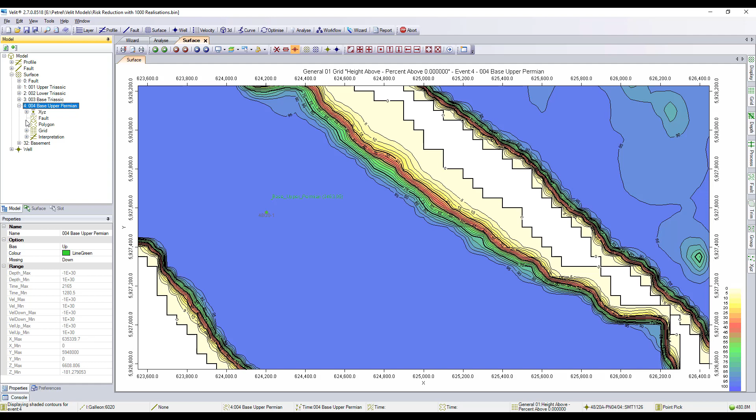So you can also use the data table to cut out the simulations at a given value. Here you can also go into more detail and, for example, compute the standard deviation. So you might look at maps in meters where you can understand the range of variability down to, for example, a 5 or 10 meter contour interval. We therefore strongly advocate that you'll be able to achieve unparalleled accuracy and depth through using Velit and this stochastic methodology as part of your analysis of the subsurface.

In summary then, whether you're dealing with oil and gas, offshore wind, or sites for carbon capture and storage, you can see how you can use Velit to supercharge your subsurface decision making. We can demonstrate with proven success how the implementation of our Constrained Stochastic Depth Conversion methodology can deliver unprecedented accuracy and depth. This can relate to operational efficiency savings in the tens to hundreds of millions of dollars.